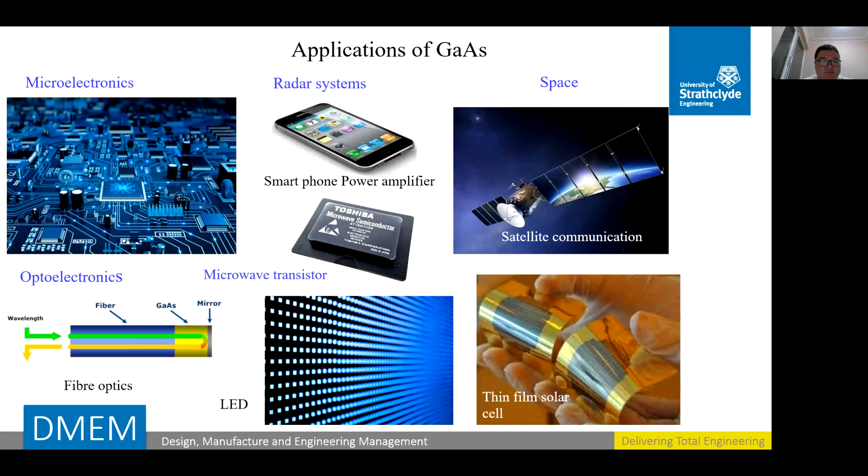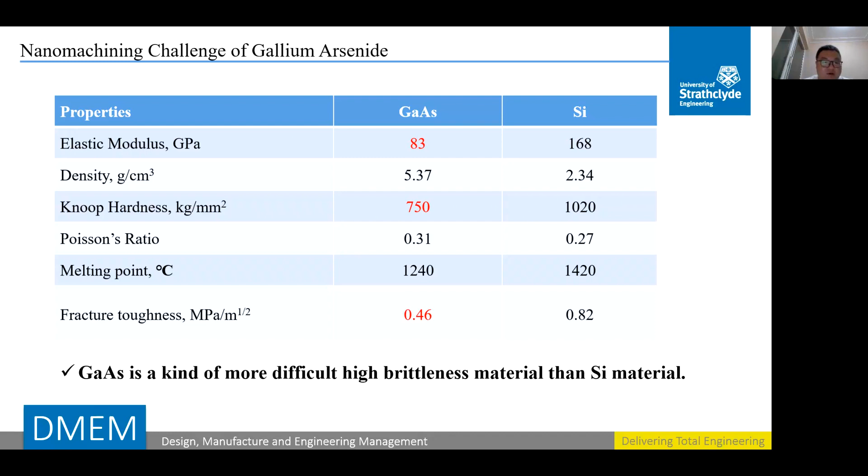On this page, we can see gallium arsenide has wide applications, such as microelectronics, radar systems, space, microwave, transistors, and solar cells. This page shows gallium arsenide has much lower elastic modulus, hardness, and fracture toughness. Therefore, we can conclude gallium arsenide is a more difficult-to-machine material than silicon.

In light of the literature review, we can see there are some approaches to fabricate gallium arsenide. Lapping and chemical polishing have been employed to machine gallium arsenide. However, these approaches are only for machining simple planar nanostructures and are extremely time-consuming. Recently, single-point diamond turning has been utilized to machine gallium arsenide as a pure mechanical method with relatively high material removal rate, in a single pass.

However, the resolution of this method is closely dependent on the size of the cutting tool, and it is very difficult to reach sub-10 nanometer resolution. A customized cutting tool with small size could be extremely expensive, and fabrication of the corresponding tool holder will be very difficult as well. The AFM-based nanomachining method is simple to use, has flexible position control capability, and relatively high material removal rate. Overall, it can overcome the drawbacks of the above methods. So in this work, I use the AFM-based nanomachining method.

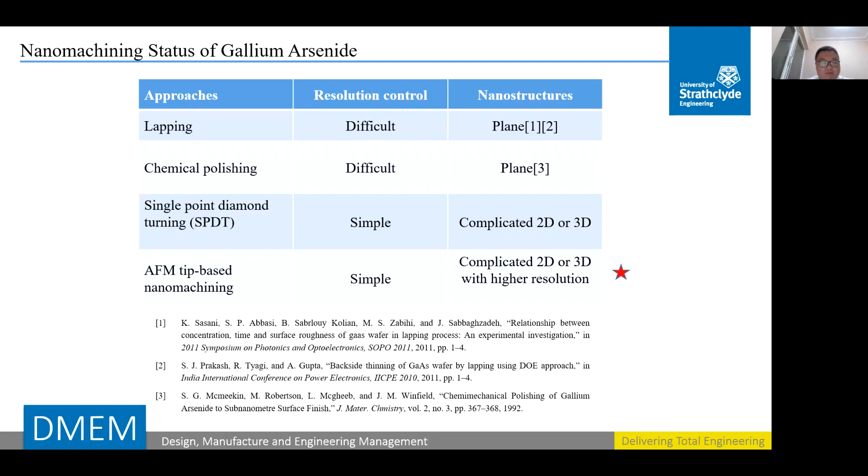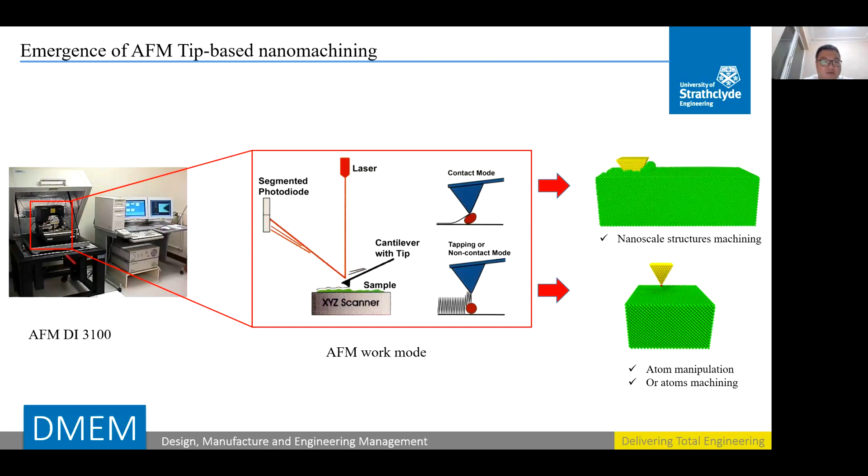On this page, AFM has three work modes: contact mode, tapping mode, and non-contact mode. In my work, I use contact mode to carry out nanoscratching experiments on the gallium arsenide workpiece. Tapping mode and non-contact mode can be used for imaging. Here is the schematic of nanomachining experiments by AFM and the nanogrooves achieved by AFM.

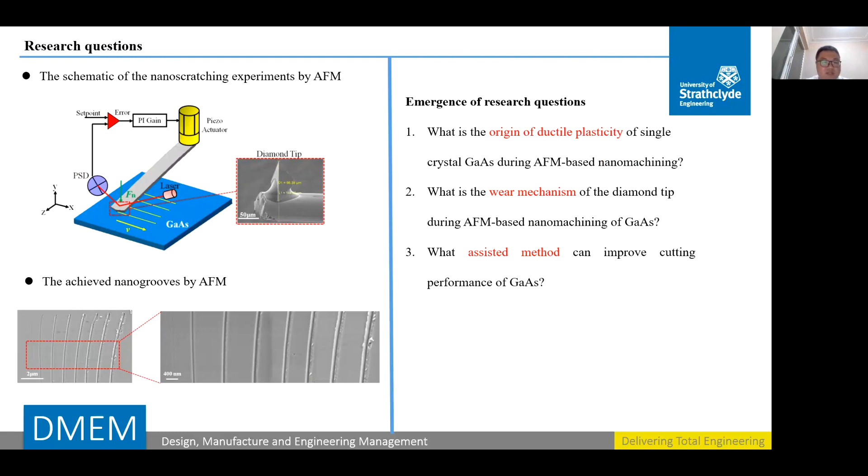Therefore, there are three emerging research questions. The first one is, what is the origin of ductile plasticity of single crystal gallium arsenide during AFM-based nanomachining? The second one is, what is the wear mechanism of the diamond tip during AFM-based nanomachining of gallium arsenide? The third one is, what assisting method can improve the cutting performance of gallium arsenide? So those are the research problems that I focus on.

On this page, it's well known that Tresca stress and von Mises stress can be used to predict yielding in ductile materials. By contrast, the principal stress criterion is more suitable to predict yielding in brittle materials. Single crystal gallium arsenide is hard and brittle at room temperature, but its chip can be removed through ductile mode. Therefore, this research looked into stress tensors and yield criteria that can be applied to describe plasticity in gallium arsenide. To achieve this aim, scalar stress values were obtained in the cutting zone.

Here, the atomic stress tensor was averaged temporally and then processed using an established 3D stress mechanics theory, as shown in this figure. It's evident that the magnitude of von Mises stress in the cutting zone was around 7 GPa, which appeared close to the experimental nanoindentation hardness of gallium arsenide. So the result shows both von Mises and the minor principal stress criteria can be used to predict yielding during ductile mode cutting of gallium arsenide.

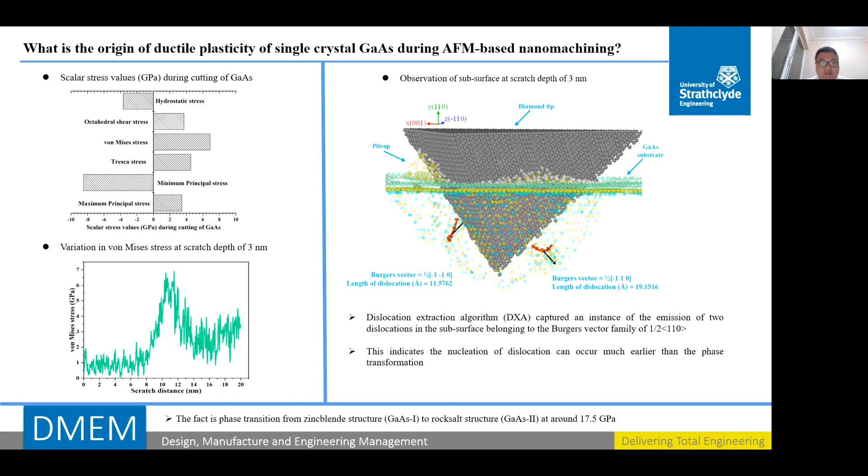Okay, in this page, it can be observed the maximum atomic displacement of the apex of the diamond tip could reach 0.12 nanometer. This occurrence of the diamond tip elastic to plastic deformation behavior is attributed to high pressure acting on the diamond tip structure. Moreover, from the enlarged diagram of the apex of the diamond tip, it's apparent that a hexagonal structure with two carbon bond gaps forms at 2 nanometer.

With nanomachining advancement, an irregular hexagonal structure was shown at 6 nanometer. Then, a complete hexagonal carbon cycle structure occurred at 10 nanometer. Subsequently, the measured bond angle and bond length of carbon were 121 degrees and 1.41 angstrom respectively. This result is very close to the graphite hexagonal lattice structure.

Finally, at a cutting distance of 20 nanometer, the presence of a clear sp2 graphite layer structure was observed. This phenomenon suggests the apex of the diamond tip transformed from the initial sp3 diamond lattice structure to the sp2 graphite lattice structure. From this, I can infer that graphitization governs the wear mechanism of the diamond tip during AFM-based nanomachining of gallium arsenide.

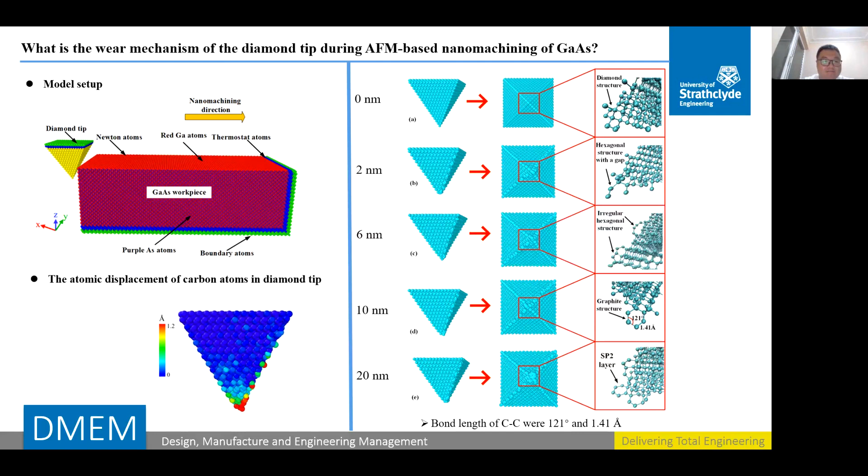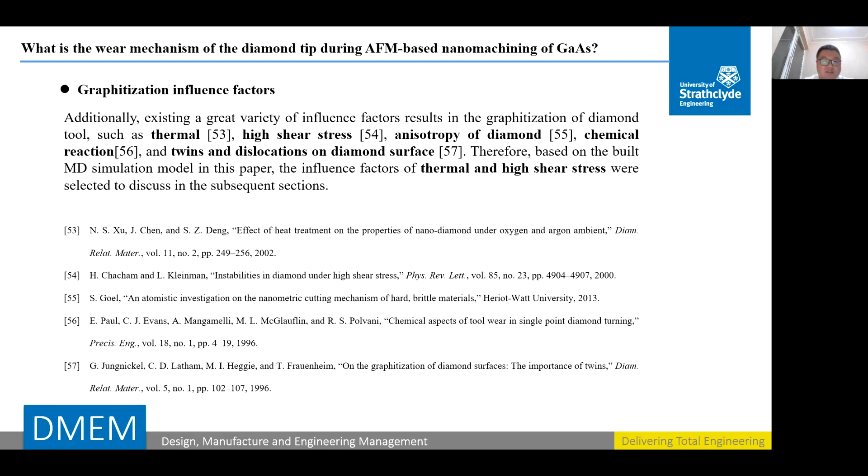In this page, the average shear stress was computed against the machining distance as shown. We can see in this page it was found the average shear stress fluctuated at a magnitude of 7 GPa. Additionally, after a cutting distance of 10 nanometer, the peak shear stress was mainly located at the apex of the diamond tip.

The magnitude of stress was much lower than the shear stress of 95 GPa that was required to induce cubic diamond lattice instability to the sp2 graphite lattice structure. This indicates that besides shear, some other factors can also cause graphitization of the diamond tip during nanometric cutting of single crystal gallium arsenide.

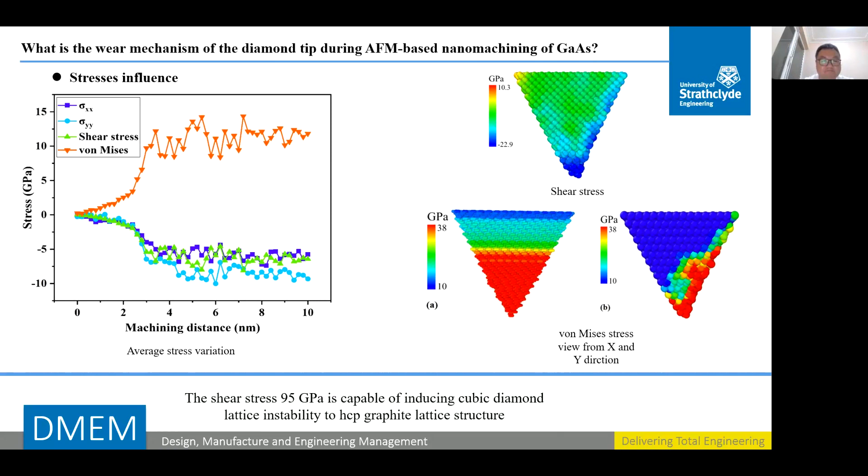In this page, we can see the average temperature of the diamond tip dramatically increased at the start of nanometric cutting, and then the average temperature kept steady at around 600 Kelvin. Another observation from this figure was the highest temperature, around 950 Kelvin, which was concentrated at the apex of the diamond tip, which was also the incipient place of graphitization.

It's known that the minimum temperature required to cause graphitization of diamond is around 940 Kelvin, which is basically the same as the high temperature of my simulation result. Therefore, it implies high temperature at the apex of the diamond tip might cause graphitization.

From this figure, we can see it includes two stages. The first one, the growing graphitization, implies initial rapid wear before 14 nanometers. Later stages of wear were somewhat steady. Therefore, this curve suggested that continuous graphitization of the diamond tip might result in tool failure during nanometric cutting of gallium arsenide.

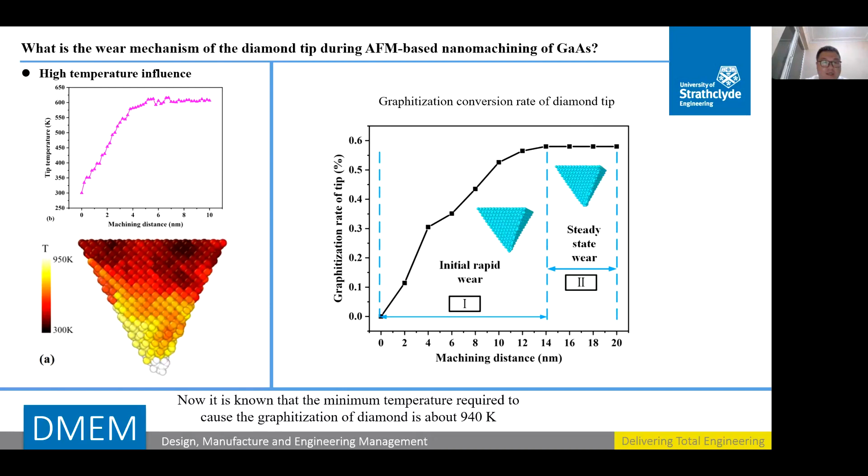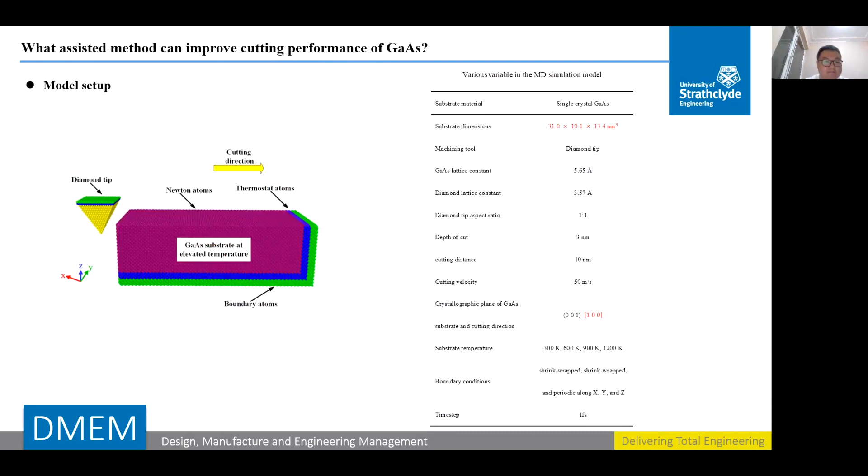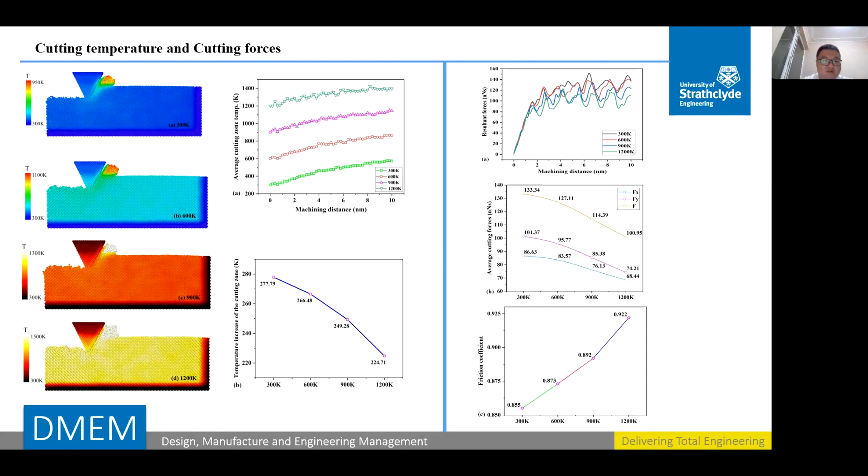In this page, I established the hot machining of gallium arsenide MD simulation model. Next, I chose three representative temperatures, 600 Kelvin, 900 Kelvin, and 1200 Kelvin, which were used to cut gallium arsenide to benchmark against the cutting performance at 300 Kelvin, meaning room temperature. Hot machining results in reduction of cutting forces with increasing temperature. However, very interestingly, the coefficient of friction increased with increasing temperature.